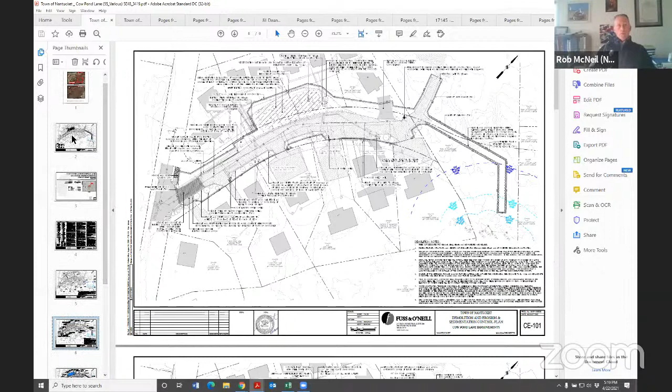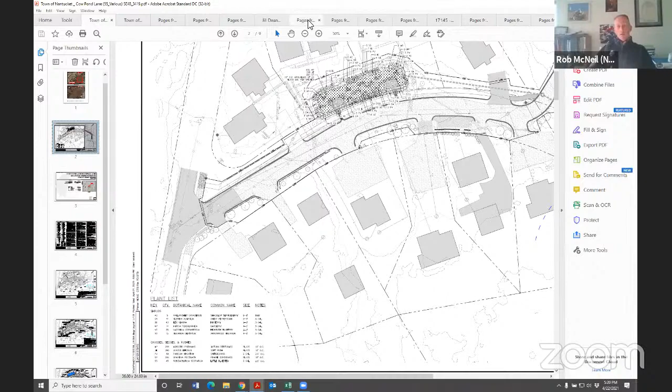Thanks, Rob. We were last heard before you guys on the March 25th meeting, and the only comment that resulted from the previous hearing was to provide some rain garden plantings in the infiltration basin. So our landscape architect has come up with a plan, as you just saw, and we hope to address that. We did need a DEP file number, which we've received since the last meeting as well.

Thank you. Are there any questions or comments from commissioners? It looks like Seth, you have your hand up.

Thank you, Madam Chair, and thank you to the applicant for going forward with the rain garden. I'm just wondering, has that plan come into the office? Because I'm not sure if it's in the packet or not. We just received it yesterday and forwarded it on to Jeff and Joanne this morning or this afternoon, so you probably did not receive it before this meeting tonight.

We do have it, I will confirm that. All right, and the planting list on it looks good? That's a good question because I obviously didn't see the plan for that either. But it looks like we got the thumbs up from Jeff.

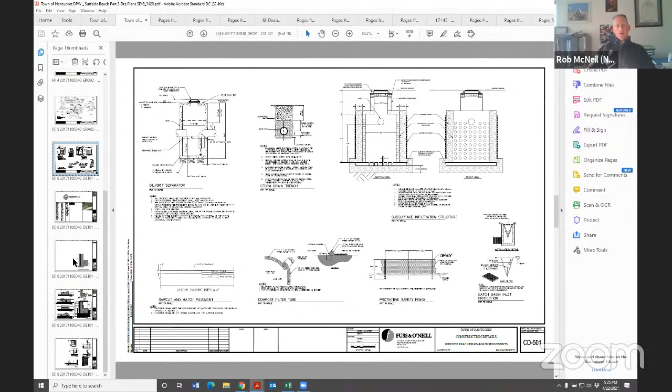There's also a move to improve the railing system and again provide a handicap accessible ramp on the eastern side down to the handicap parking area.

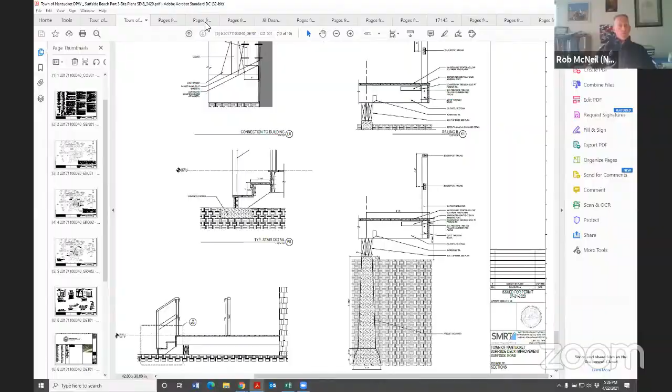On the stormwater portion of the project, the parking lot right now floods with any rainfall over about half an inch, and it takes up to 72 hours for that water to infiltrate through the existing structure. So our improvements are to add an oil and grit separator and another infiltrating structure, and all three structures out there will start providing some treatment to the stormwater.

There'll be a hood on the existing infiltrating catch basin. The oil grit separator will provide some treatment, and the new infiltration structure will also provide treatment to the stormwater. When everything is constructed, the only things you'll see out there adjacent to the proposed deck are two manhole covers, so the impacts to the area next to the beach access path are fairly minimal after construction.

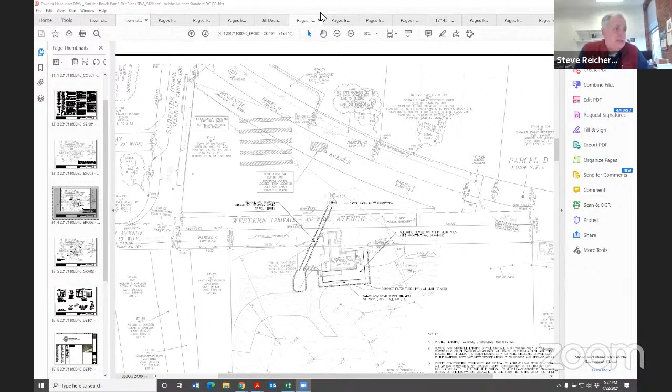All of these proposed improvements are within the 100-foot buffer for the coastal dunes. Portions of the deck and some of the infiltration structure are within the 50-foot buffer.

So with that, do you guys have any questions for us? Yeah, are there any questions or comments from commissioners? Seth?

Thank you, Madam Chair. Although I support the overall idea of improving drainage on the site, I'm concerned about adding additional structure within the 50-foot buffer to the coastal dune, especially with regards to the wraparound deck. I don't see any request for a waiver within the submission, which would be required for this type of work. Any new structure within a 50-foot buffer to the coastal dune is not compliant with our performance standards, and there needs to be justification as to why that's needed through a waiver request.

And I don't necessarily see the benefit of increasing the deck area behind that structure, other than from a concessions perspective. But from a natural resource management perspective, I see that as going to be detrimental to the resource areas that we protect.

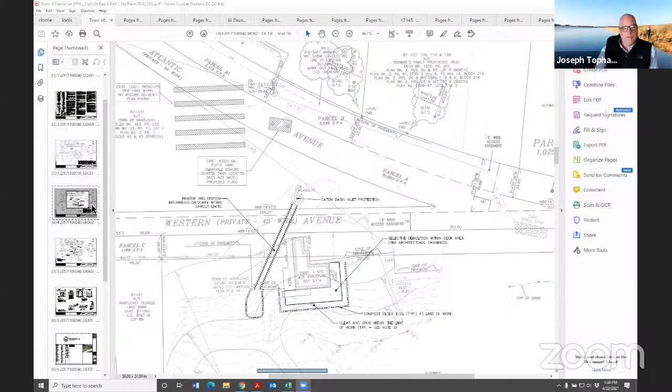Thank you, Seth. Joe? Madam Chair, two points of clarity. One, I don't know if Joanne could bring up the site plan showing where the well is located. And number two, do we have a photo of where the showers are? The only thing I saw was just a hose bib, so I'm a little confused on where the showers are. Thank you.

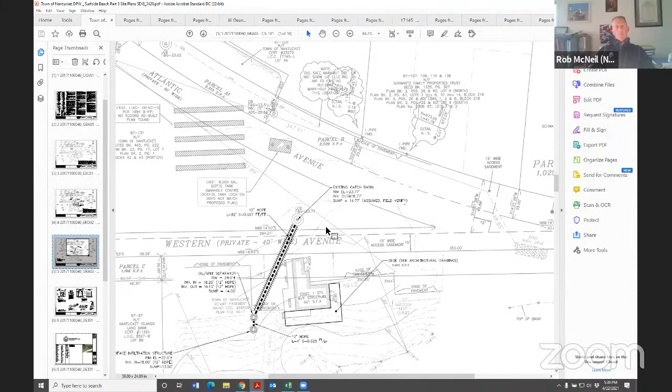Madam Chair, I believe the well is located in the building footprint. I don't remember the other part of that question - sorry, outdoor shower, thank you. The outdoor shower has a foot shower and a full-size head shower off the back.

I only noticed the foot one, sorry. Yeah, that's all I saw. I went out there, but in that photograph, all I see is the hose bib, and on the architectural plan it's just shown as a hose bib, not a shower head. I didn't know if that could be located on the north side of the structure.

Sure, just - yeah. I'm sorry, Madam Chair, there is a hose bib on the rear of the building on the east side that is different and separate from the showers. Thank you for clarifying that.

Any other questions or comments from commissioners?

Mark? Should we pursue the issue of the waiver request, since there maybe should be one if we're going to build a deck there? I think that is, yes, something this applicant should look to deal with. I would also like to see on the plan where that well is located, and some other justification for not having infiltration just under the parking lot would be helpful.

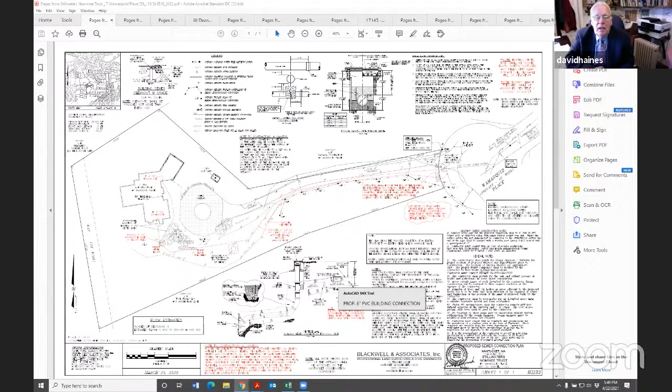Waivers may be granted for two reasons: no reasonable alternative with no impact to the resource area, or a significant improvement to the resource area. Eliminating the septic system is generally considered an improvement, and there is no alternative to get the sewer out to the road while keeping it out of the water table, since it has to be at a certain depth. It's fairly straightforward. Usually these things are handled with a notice of RDA if possible, but because of the close proximity, it was thought it should be filed as a notice of intent. And that is my presentation.

Anybody have any questions? Thank you, David. Are there any questions or comments from commissioners?

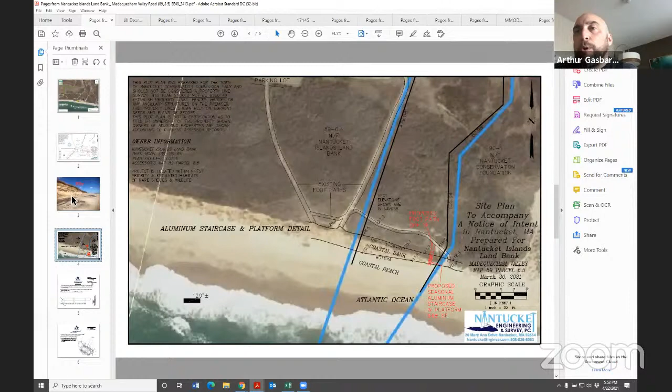Thank you, Madam Chair. This is also another set of beach stairs for public use on land bank property. This project is a little bit different in that we actually are within the resource area because we have a coastal bank. But in this case, what's being proposed is a seasonal set of aluminum stairs, which could be removed so that they're essentially not lost to erosion. There's already current footpaths that head over to this area where people are kind of going down over onto NCF property, which you can see in the aerial, and then down the bank and kind of just making their way. So the hope is to keep this on the land bank property. There would have to be a fairly short trail cut off of the existing trail that would go to this set of stairs. What we're proposing is an aluminum platform as well, so that we wouldn't actually have to create a deck.

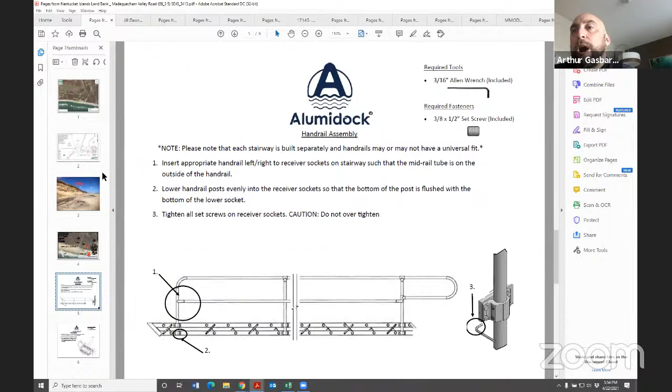And the same company, which we included the details of, that makes the stairs, makes this platform. It all kind of bolts together and then can be removed. The platform is held in place just by pounding a couple of pipes through the side grommets on the edge of the platform. So we think that it's a good solution for this location that's experiencing regular erosion. It will help keep the pedestrian activity off of the actual resource area and allow access to the beach. We'd be happy to address questions or concerns that you may have.

Thank you, Art. Are there any questions or comments from commissioners? I know, Art, I just had one. I guess it's the footpaths that are to the west of where you're putting the stairs. I'm assuming those have too steep of a drop off right now, so people just aren't using them. Yes, it's also much higher. So that's part of why we chose this location.

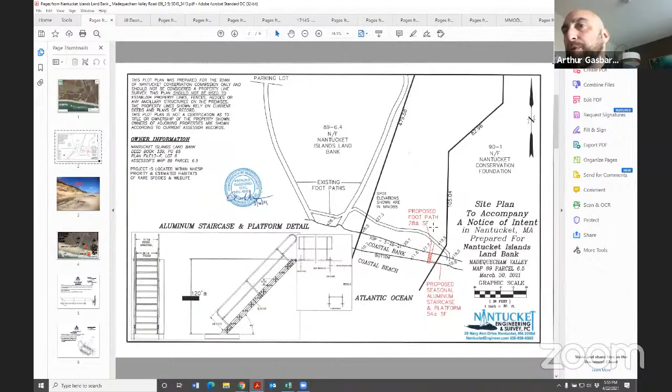The top of the bank is a little bit lower, and part of having these staircases is that they have to be handled by the staff and brought in and out of there, and so the weight that is included here, the shorter the set of stairs, the better essentially. So that's the reason for, you can see that I put spot elevations on the plan where the footpaths to the west at the top of the bank are up around elevation 28, whereas we're proposing the stairs, we're closer to 21. Perfect, thank you for explaining that a little bit more for me.

And if I may, Madam Chair, we will request a continuance because we are waiting on natural heritage for the section, there's that little bit of a path that we want to cut as well, so we'll need to hear from them. Okay, thank you. Jeff, do we have any comments from the public on this one?

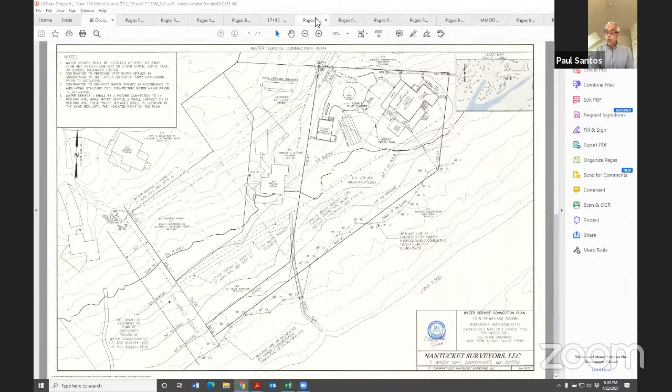The excavation work would be limited to trenching for the proposed water service line. We'd stake the line and place silt fencing along the southerly limit for the entire length during trenching. The trench itself would be 3 feet wide, with the water service pipe placed inside. The area falls outside NHESP jurisdiction. We do have a DEP file number, and the intent is, with this board's permission, to complete this work as soon as an order of conditions is issued and staking is completed.

I'm happy to answer any questions you may have. I think the application is pretty straightforward.

Thank you, Paul. Are there any questions or comments from commissioners? Looks like no. Jeff, do we have any questions or comments from the public? No. And do we have everything we'd need to close? Yes. Okay, Paul, would you like to close? Yes, I would. Thank you.

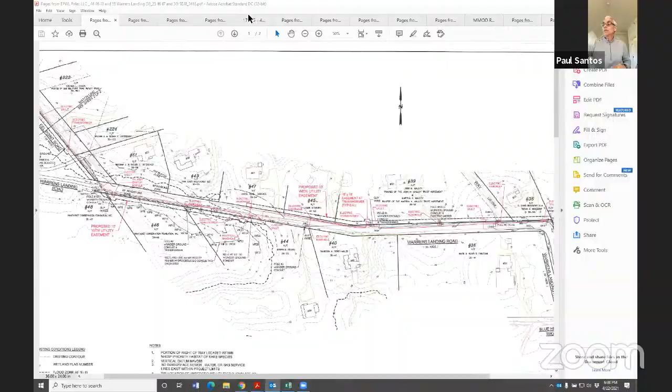Ultimately, we think there's a safety issue that's enhanced with the removal of the pole line, and a number of other issues too that may not be directly wetland related, but that we do feel are a benefit here by getting a removal of the pole line itself.

We do have a DEP file number. The activity does fall within a mapped area and does require review by NHESP. It has been submitted to them. I've actually had a conversation with them today to answer some questions that they had. I do fully expect to have their review, which I believe will be a positive one, in hand for the next meeting. So we will be unable to close the meeting tonight, but obviously we wanted to make this presentation to you and answer any questions that commissioners may have, and happy to do so at this point.

Thank you, Paul. It looks like Joe has a question. Not a question, more of a statement.

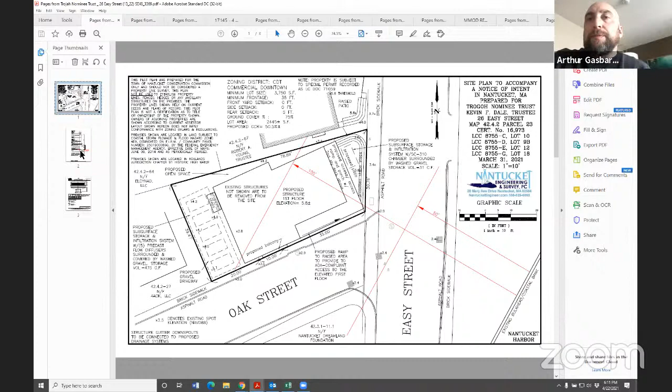And what we have added and provided for supplemental information is that we went back based on the comments that we heard and tried to come up with a way to allow the floodwaters to go underneath this building and also be able to infiltrate.

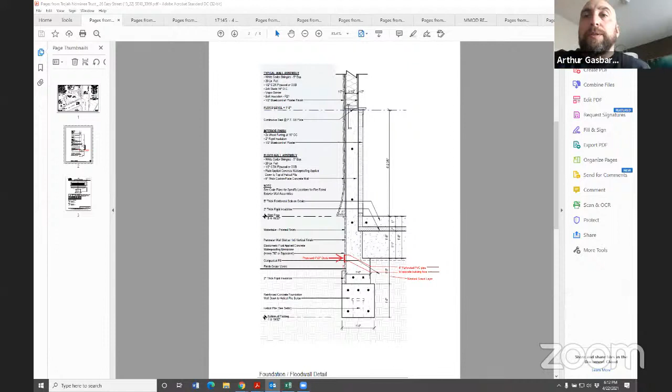The grates and the pipes would connect to the other side of the building, so it could allow for essentially passage in both directions of floodwaters, as well as to enhance the ability of the land to absorb those floodwaters, which we believe is in keeping with and meeting the performance standards for land subject to coastal storm flowage. And I hope that addresses the concerns that were outstanding.

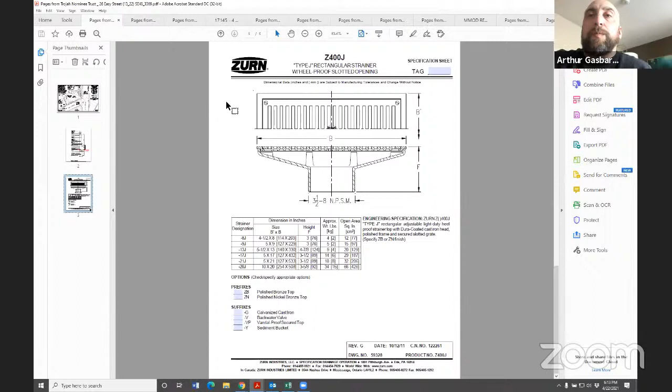And what's in front of you right now on the screen is just an example of the grate. It would be essentially a bronze 4x4 type of grate. We had discussed at the last meeting concerns we had with, if the building, which has a floor system that is not very high above the existing grade, allowed full flow of floodwaters under there, you could have flotsam and other deleterious materials that could get stuck under there and it could get mucky. So we're hopeful that the grates in the system we've come up with meets those concerns.

And I'd be happy to address any questions that you may have.

Thank you, Art. Through you, Madam Chair - Art, thank you. That detail is exactly what I was hoping for, something along those lines. Thank you for sharpening a pencil and coming up with a creative solution. So thank you.

Any other comments or questions from commissioners? Looks like no. I have to echo what Joe said - I was really happy to look in our packet and see that you guys were able to work with this site a little bit more. So I definitely appreciate that. Sure thing, I think the process worked.

Jeff, do we have any public comment on this one? Nope, and you have all of the required information. Perfect. Art, would you like to close?

Yes, please. Is there a motion to close? Motion made by Mark, seconded by Joe. So by roll vote: Beal, Aye. Engelborg, Aye. Arisman, Aye. Golding, Aye. LaFleur, Aye. Topham, Aye. That carries unanimously. Thank you. And that moves us on.

That moves us on to MLR3 LLC at 45 Shawkemo Road, represented by Brian Madden and Ryan Maxwell from Bracken Engineering.

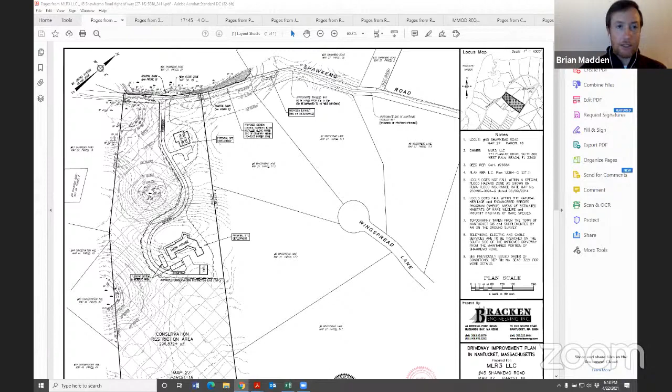Thank you, Brian. Are there any questions or comments from commissioners? Seth? Thank you, Madam Chair, and thank you, Brian, for providing additional detail. This question is for Jeff, but it relates to our waiver process.

Does a statutory requirement of access for emergency personnel, is that sufficient to overcome the regulations that we have in place? Is that information enough suitable for a waiver, or do we need more information from the applicant?

I certainly appreciate them contacting the department and getting that information. So the applicant in this case did, in the initial application, provide a waiver request justifying the work under provision A, the no adverse impact, no reasonable alternative standard. They were also suggesting it under B, that the work proposed is separated from the resource area by an area out of their control, typically like a roadway or part of a traveled way, where the resource area is on the other side, so they don't necessarily have control over the buffer zone area on the opposite side.

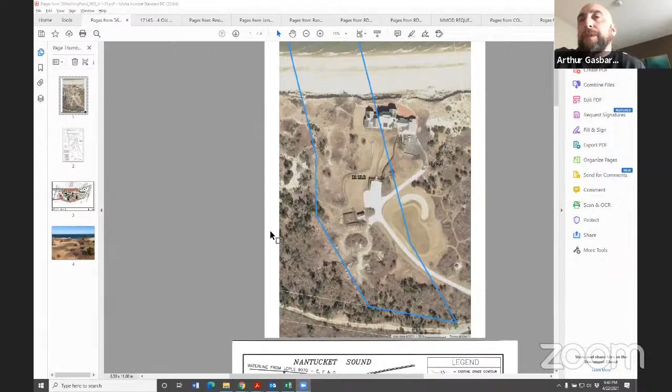I'm before you tonight with a notice of intent for essentially landscaping within the 100-foot buffer zone to the top of the coastal bank. Property at 36 Washing Pond, I believe the commission is all familiar with. This was a lot that was subdivided out of 34 Washing Pond.

Shown on the plan in front of you is the top of the coastal bank in blue, and the 25, 50, and 100-foot buffer zones shown in red. Shown in green is the limit of work and the proposed silt fence, which is outside of the 25-foot buffer zone. There's also an area with a dashed line labeled in green going to the north, which signifies the priority and estimated habitat mapping by Natural Heritage.

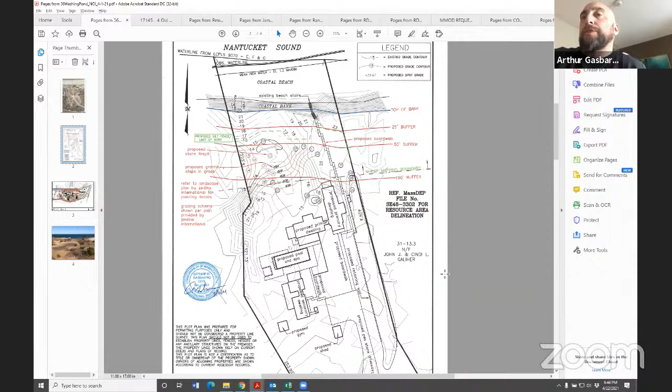The development of this lot has kept essentially all of the residential structures outside of the 100-foot buffer zone. However, we wanted to show you essentially everything proposed on the lot, even outside of your jurisdiction. The work proposed within your jurisdiction is grading, landscaping, and some hardscaping, which includes a stone fire pit and a sitting-type wall, and grading and plantings.

There's the plan that's before you, and we also filed a supplemental landscape plan. Also proposed is an elevated boardwalk, which would lead from the structures through the buffer zone to the existing set of stairs to access the beach.

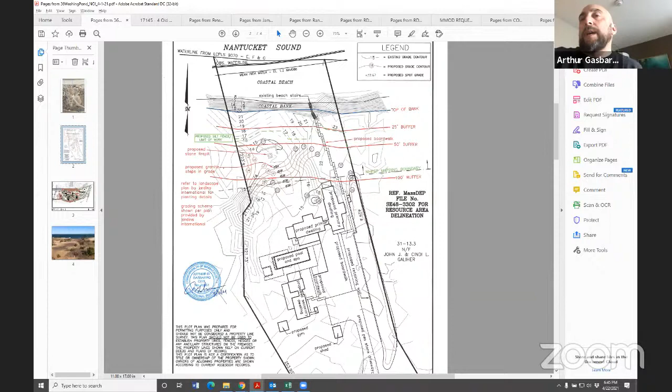We did request a waiver, and I think there should properly be some discussion about this walkway as a structural element. There are details on the landscape plan. We feel that the walkway would serve a long-term net benefit by allowing vegetation to grow underneath it.

If we go back to the drawing for you, so there's your boardwalk, essentially confining pedestrian activity - instead of just having a regular path where folks and activity may stray from that path, they'd be more inclined to stay on that boardwalk. It's also in keeping with the regulations.

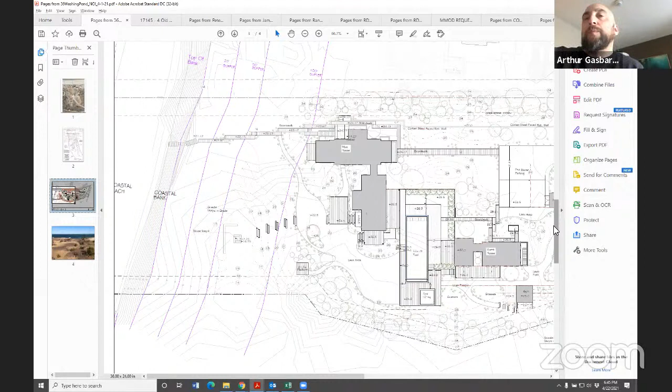While this is not through a dune area, the regulations do require that when you have walkways through resource areas, you create them to be elevated so as to prevent adverse impact on the vegetation. So we feel that we're meeting a higher standard essentially by doing that in the buffer zone. We'd be happy to address any questions or concerns you may have with the application.

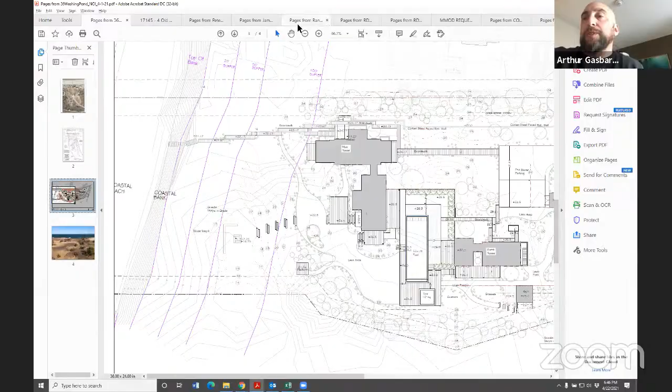Thank you, Art. Are there any questions or comments from commissioners? Seth?

Thank you, Madam Chair. I have a few questions related to the boardwalk. First, I'm wondering why that boardwalk wouldn't be considered water dependent if it's essentially providing access to the beach and down to the water.

Also, you talked about in the waiver request wanting to have the elevated boardwalk instead of a path so that people weren't straying from the path and causing additional disturbance. Have we seen those types of impacts already occurring on site? Is there a traveled path and has there been disruption? If so, I would hope that any areas that have been compacted or disturbed could be mitigated and revegetated when the elevated boardwalk goes in.

Art: Yes, thank you, Madam Chair. I agree with you in terms of a water dependent use, though my understanding and recollection of past practice has been that the commission typically didn't extend their consideration of walkways or platforms or anything like that beyond the actual set of stairs to access the beach to be considered water dependent. So that's why I instead asked for the waiver instead of going down that path, no pun intended.

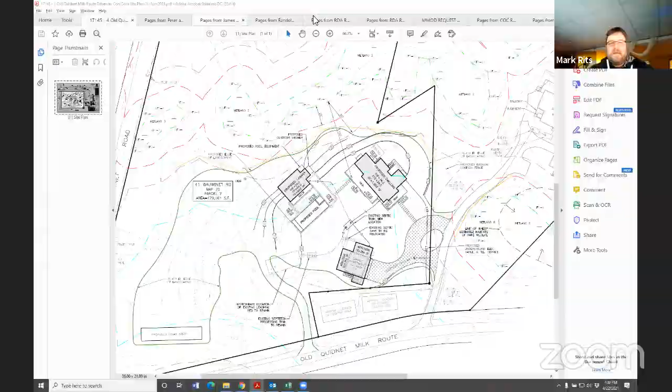That basically summarizes the bulk of the project. We have provided a grading cross section to show the commissioners what we're proposing for grading. The bulk of the grading is happening outside of the 50-foot buffer, and we're really trying to minimize grading and landscaping within the 50-foot. With that, I'll be happy to answer any questions.

Thank you, Mark. Are there any questions or comments from commissioners?

I'd like to thank Mark for adding those details to the plan, because I think that's helpful, and I think shoehorn is the appropriate description. I have nothing further to add. Thank you, Mark.

Thank you, Ian. Any other comments or questions from commissioners? Looks like no. Jeff, do we have any comments or questions from the public?

No, you do not. Do we have everything we need to close these two? Unfortunately, we are still waiting for natural heritage. So Mark, would you like to continue for two weeks? Yes, I'd like to continue to the next meeting and hopefully we'll have heritage squared away by then. Okay, so that will continue until May 6th.

Thank you. That moves us on to Peter and Caitlin DuPont at 47 Millbrook Road, Lot 1. It's actually Brian Madden representing both of these. Sorry about that. No problem, thank you very much. Brian Madden from LEC for the record, representing the DuPonts.

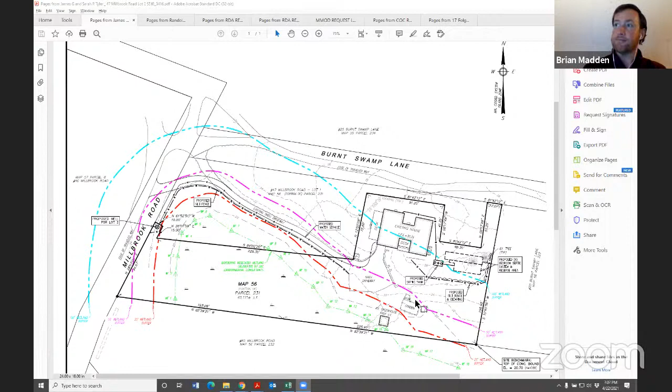Basically, this is just to install a new IA septic system, with the work being proposed next door. These are daughter and son-in-law; these are the parents. The only minimal activity within the 100-foot buffer zone is a portion of the septic tank that minimally encroaches into the 100-foot zone. With the new septic layout, the well needed to be relocated, up along Millbrook, and the water line will follow the existing driveway across to the house. That's basically it — no waivers proposed on this one.

Thank you, Brian. Are there any questions or comments from commissioners?

Looks like no. Jeff, does the public have any comments about Lot 2? I would say that the same comments probably still apply, but I think Brian has answered those questions. Okay, perfect. So Brian, would you like to close?

Please. Is there a motion to close? Motion made by Mark, seconded by Joe. So by roll vote: Beal, Aye. Engelborg, Aye. Arisman, Aye. Golding, Aye. LaFleur, Aye. Topham, Aye. That carries unanimously.

And that moves us on to Randolph G. Sharp Jr. Trust at 49A Meadowview Drive, represented by Brian Madden and Ryan Maxwell. Thank you very much. Brian Madden for the record.

Proposed project involves the construction of a single-family dwelling and appurtenances. The resource areas on or abutting the parcel are BVW within the northwest of the proposed limit of work, and a BVW in the eastern portion of the site that extends off-site. To the south, there is a small pond that abuts Meadowview Drive. The proposed structures are all outside the 50-foot buffer zone.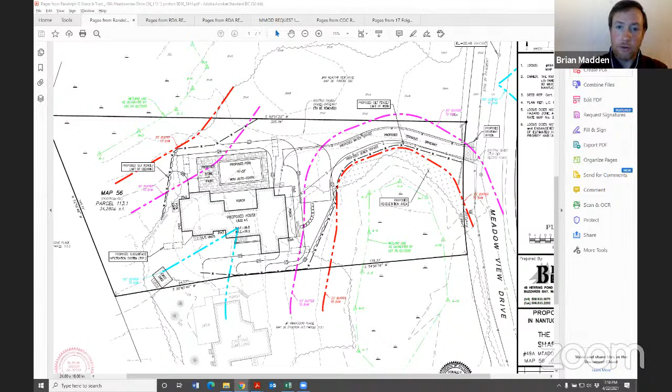And I'll turn over to questions. Thank you, Brian. Are there any questions or comments from commissioners?

Looks like no. Oh, Ian? I mean, we've dug our heels in about the 2-foot groundwater when it comes to pools and plus the house. What are they? I mean, it seems like, with respect Brian, it seems like an unending battle to try and enforce what we've done previously. Thank you, Madam Chair. Thank you, Ian.

If requested, we can certainly provide a little bit more information on that front. We haven't, I don't believe, had any soil test borings directly in these locations, but based on some past soil testing in the area, it is highly variable, and it's not actual groundwater that's encountered. It seems to go to a clean sand below, and then you hit the actual groundwater. But certainly we can provide more information to justify the no adverse impact statement.

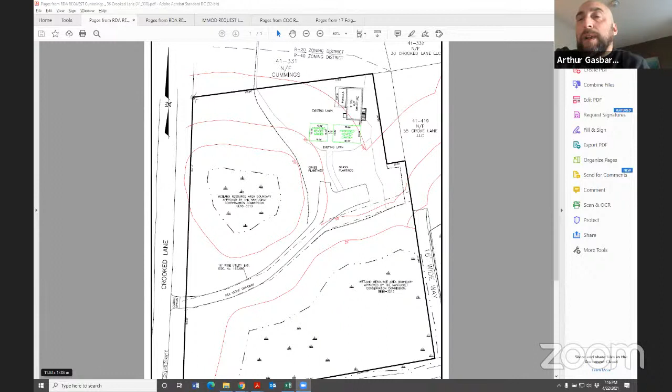That moves us on to requests for determination. We have Cummings at 36 Crooked Lane, represented by Art Gasbarro. Thank you, Madam Chair. Before you tonight is this property, where we have a bordering vegetated wetland as well as an isolated vegetated wetland. The buffer zones are shown in red, the 25, 50, and 100-foot buffer zones. The driveway goes up between the two resource areas. Shown in green is the proposed project, to construct two fenced gardens within an existing lawn area. We've adjusted the fencing around the gardens so that it doesn't encroach into the 50-foot buffer zone, so no waivers are required. I think it's fairly straightforward, but happy to address any questions or concerns.

Thank you, Art. Are there any questions or comments from commissioners? Seth? Thank you, Madam Chair. I know this is something we've thought about doing more for notices of intent that have come in, but with any proposed gardening projects, I think we need to condition them to require soil testing and limit fertilizer and agricultural chemical use based on those tests. So hoping that when this is put forward, we could include those conditions within the RDA.

Thank you, Seth. Jeff, are we able to add that to the RDA? Yes, you do have the ability to do some limited conditioning through RDAs. Okay, thank you. Any other questions or comments from commissioners?

Ian? Yes, I'd like to thank Art's clients for coming forward on this because otherwise I think it probably would have gone under the radar. So thank you, Art. I'll pass that along, thanks to them. Thank you. I didn't even think of that, but that's totally true. So I appreciate them doing the right thing and getting their permits.

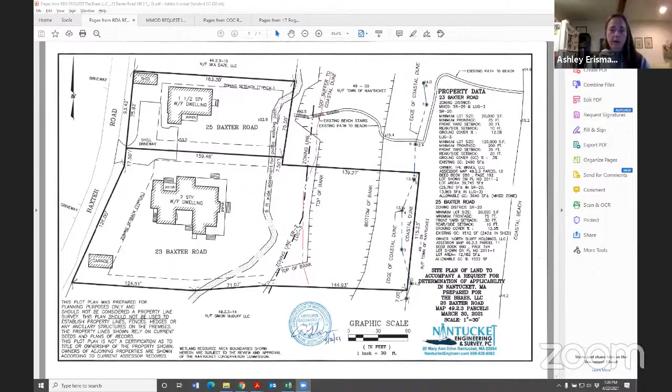Thank you, Art. Are there any questions or comments from commissioners? Looks like no. Jeff, what would staff recommend for this one? We did an inspection and looked at the soils there and some of the vegetation and parent material, and agree with the delineation. We recommend a +2A, confirming the resource area boundaries.

Thank you, Jeff. Would somebody like to make that motion to issue a +2A? So moved, a motion made by Joe. Is there a second? Seconded by Ian. So by roll vote: Beal, aye. Engelbourg, aye. Erisman, aye. Golding, aye. LaFleur, aye. Topham, aye. That carries unanimously. Thank you.

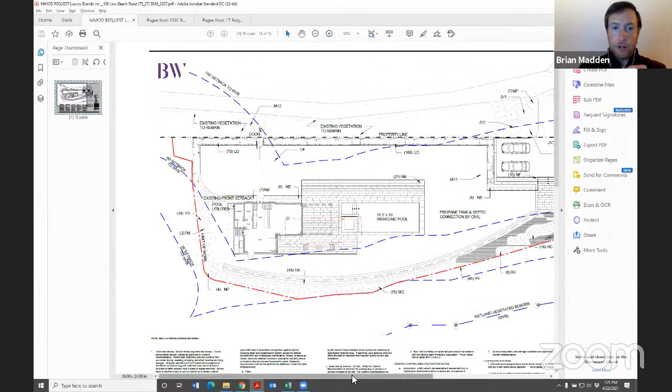That moves us on to minor modifications. We have Luxury Brands Incorporated at 100 Low Beach Road, represented by Brian Madden. Thank you very much, Brian Madden for the record. The proposed minor updates include a slight reduction in the size of the pool house and patio area, and relocating the driveway and parking area further to the east.

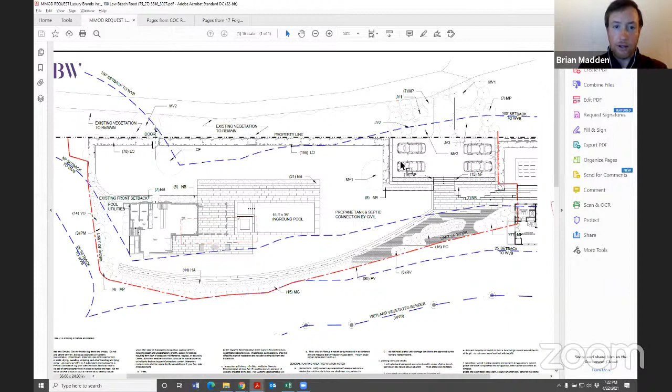Slight reduction for the pool equipment location. There's some planting details updates, some landscaping updates, steps and pavers. We also showed some septic connection details that have been approved by the Board of Health. And with that, I'll turn over to questions.

Thank you, Brian. Looks like Seth has a question or comment. Thank you, Madam Chair. I have some concerns about the proposed planting schedule.

I see that in general there's a great mix of native plants here, but there's also non-natives and some plants that are potentially detrimental that I'd like to see removed, especially in the areas to the south that are closer to the resource area. There's no reason to have the Myrica gale, the southern bayberry, when you could just plant more of the northern bayberry.

I know hydrangeas are typical Nantucket planting, but within the buffer zone I'd prefer not to see those. Same with the flowering dogwood, the magnolia, the privets, and also the catmint. Keeping the areas within the buffer zone limited to native species would be preferable in my opinion. I did look at where each of these things are being proposed, and I think doing a second look and maybe relocating things or removing some species as necessary would be beneficial for this site.

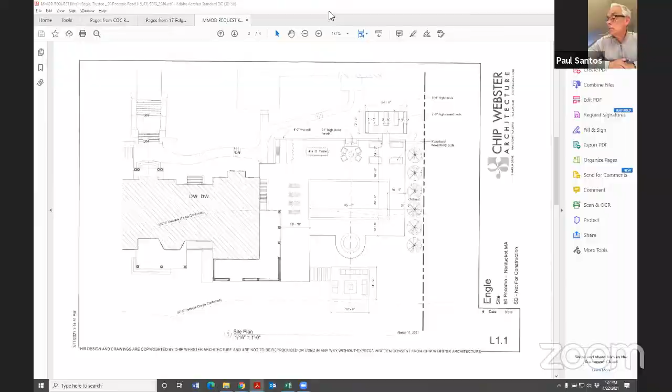Thank you, and that moves us on to Kristin Engle, trustee at 90 Pocomo Road, represented by Paul Santos. Thank you, on behalf of the applicant Kristin Engle, the address is 90 Pocomo Road. This is a minor modification in which we are simply incorporating into your file the final landscape plan, which is the final location of a pool and spa that had previously been approved under a notice of intent, and had been slightly modified under a prior minor modification. This is the location they intend to go with and construct. It is a previously approved pool and spa in a location within your jurisdiction that did not require any waivers, be it for building setback or groundwater separation. So we're simply incorporating this plan, hopefully as a minor modification, into the project file, and happy to answer any questions.

Thank you, Paul. Are there any questions or comments from commissioners? Looks like no. Jeff, do we have everything we would need to issue the minor mod? We believe so, yes. Okay, is there a motion to issue the minor mod? Motion made by Dave, seconded by Mark.

So by roll vote: Beal, aye. Engelbourg, aye. Erisman, aye. Golding, aye. LaFleur, aye. Topham, aye. All right, that carries unanimously. Thank you, Paul. Thank you.

And that moves us on to certificates of compliance. We have S/P Norwell LLC, Lot 5, Mariner Way, and we have this represented by Kathryn Barnicle.

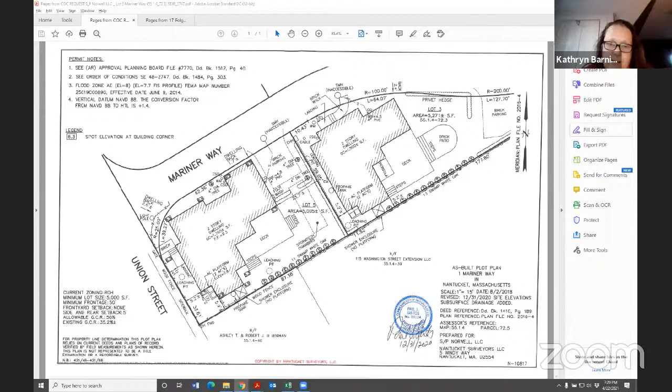So we're requesting a certificate of compliance for lot 5.

Thank you, Katie. Are there any questions or comments from commissioners? Looks like no. Jeff, have you been out to check the site?

Yes, we would agree that it is now in compliance with all of its original permits and that the certificate could be issued.

Is there a motion to issue the certificate of compliance? Motion made by Dave. Is there a second? Seconded by Joe. So by roll vote: Beal, aye. Engelbourg, aye. Erisman, aye. Golding, aye. LaFleur, aye. Topham, aye. That carries unanimously.

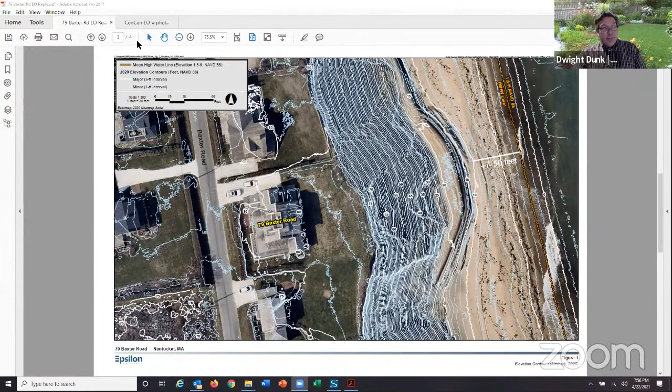What we've also done is compared aerial photos — the current one we just looked at from 2020, as well as a rectified aerial from 2010. We can see the lines of the coir terracing that were covered by sand at the time, and basically it has remained about 260 feet from the road.

We can't use the Weimar residence as a reference because it was moved landward in the last 10 years. But the coir install has not really changed since 2010, and likely wasn't different from where it was prior to 2010. So access along the beach remains there, except during storms and periods of high surf.

We have members of Sumco here if you have questions for the contractor. But in terms of trying to resolve the enforcement order, we discussed potentially three conditions to allow maintenance work to continue as needed on these coir installs.

One: put in place a requirement that the contractor shall notify the Conservation Commission staff at least 48 hours before work, by submitting the start work notification form.

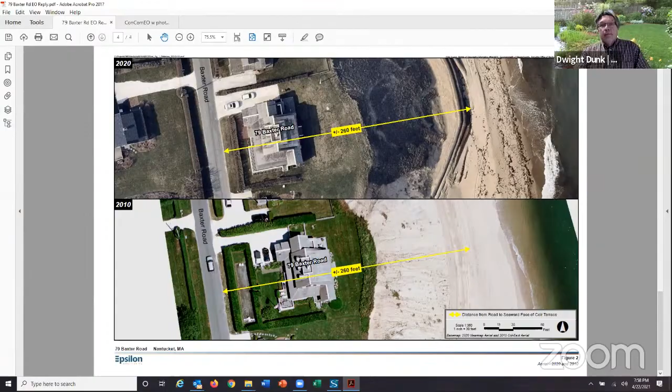Thank you, Dwight. Ian? Yes, Madam Chair. So with respect, Dwight, I wonder how we could really resolve this going forward about interference with pedestrian access along the beach at high tide.

Because I was out there both on December 16th and December 18th last year to see how the geotubes had fared with the storm that had taken place around December 14th through 16th. And I have photographs on my phone from December 18th at 2:55 p.m., which, if memory serves, was after high tide, and it shows clearly that the water is right up.

I had to clamber up onto the jute tubes. Well, not onto the geotubes - I'm talking about Helmut's property here, onto the jute, to get around.

I'm surprised that you feel it's 50 feet away, so I wondered if perhaps we need photographic evidence going forward so that we can resolve this. Okay, well, thank you, Ian.